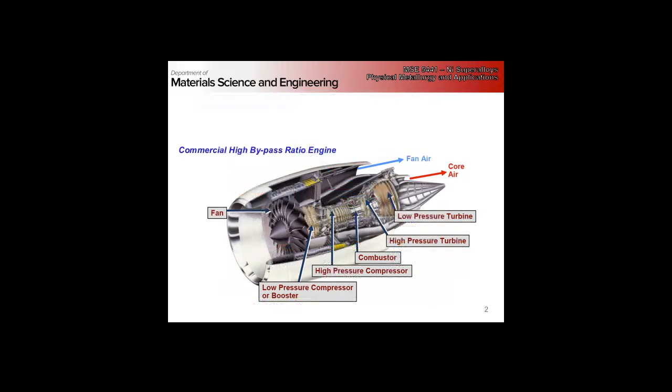And just showing where we are, right? I mean, you probably in freshman and sophomore year had an overview of a turbine engine in one of your engineering design classes, but it works just like any other engine, right? It's suck, squeeze, blow - that's the basic

operating principle of any heat engine. But right, you have compressor, inject fuel, light it on fire, you get expansion across the turbine that lets you do work.

But if we look at particularly the operating temperature, at the T41 stage here, modern engines now are approaching 1625 for military engines, a little lower than that for civilian engines.

So the interesting thing is this pressure ratio. Why between engines of about the time you guys were born and now, why are we seeing a drop in pressures? It's that high bypass turbofan, right? Not nearly as much air is going through the engine. Most of it is, right?

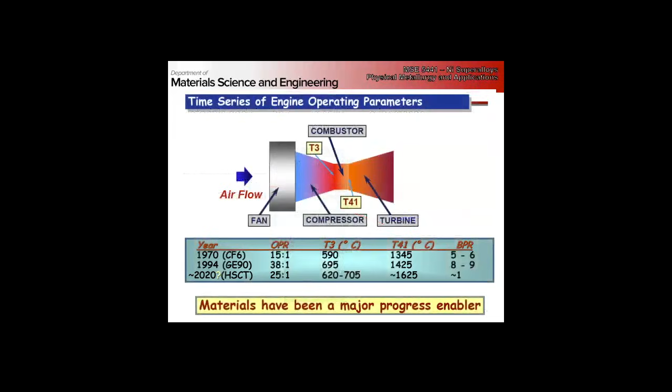Right now, we're running engines that are above the melting point of some of the alloys making up the blades, all because of a combination of very high strengths, active cooling, and thermal barrier coatings. Obviously, the metal itself doesn't see that temperature - it's in an environment that is above its melting temperature.

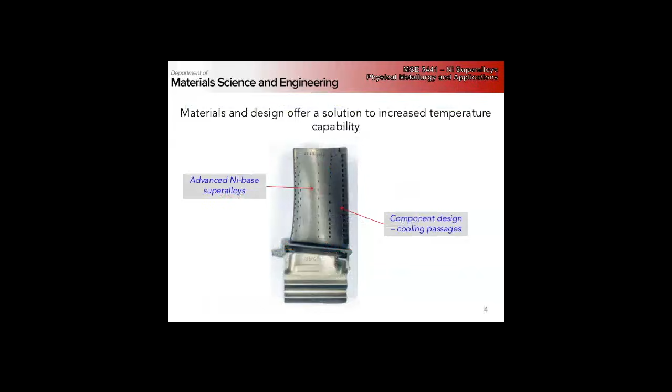Why single crystals? Better creep properties. So our major design constraints are going to be creep and fatigue, specifically low cycle fatigue.

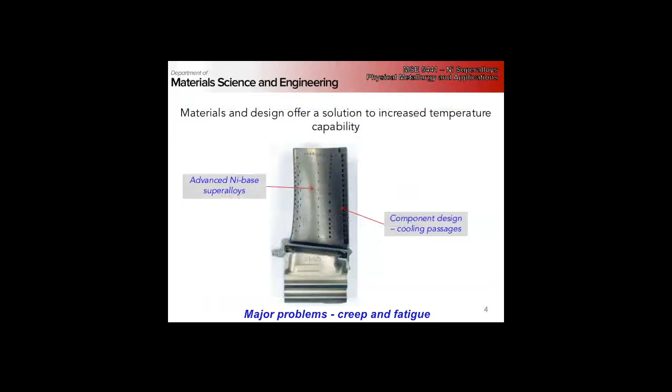So when I say superalloy, what do I mean? Very simply, a metallic alloy which can be used at exceptionally high temperatures, homologous temperatures of 0.7 and above. So the use temperatures are going to be 70% of melting temperature. Why is that significant? What typically happens to properties around that? They take a nosedive.

So we need creep resistance, high temperature capability, oxidation resistance. We don't want any high temperature corrosion. And there are superalloy systems based on iron, cobalt, and nickel. We're going to focus on nickel because that's what's basically used.

Cobalt - why is a lot of research going on to cobalt superalloys right now? Higher temperature capabilities, but it's not capable in terms of strength. So it's higher melting temperature. If we could push that, the problem is we currently don't have the strength with cobalt, and we'll talk about that as we go through.

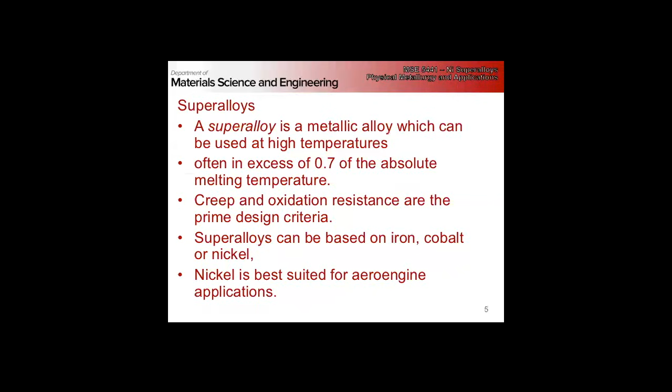So right now, nickel still reigns supreme. Let's take a quick look at our nickel-aluminum phase diagram. The alloy system we're really interested in is nickel-aluminum-titanium, but looking at ternaries is a little complicated, so let's just start with nickel-aluminum right now.

So if we see at about 80% or so nickel, we're in the two-phase gamma prime region, and we go up to quite high temperatures before we dissolve our gamma prime. We go full nickel in, we go full gamma above our solvus into a solid state regime before we start to see any melting.

And this is basically our main processing window. We're going to process, come up super solvus, dissolve all of our gamma prime out, come down, and precipitate a gamma prime structure, and the two-phase microstructure is going to be our main strengthener.

Now, if we look at the other side, the aluminum-nickel side, there's no appreciable solubility of nickel in aluminum. It's basically line compounds, pure nickel or pure aluminum and the intermetallic. Whereas on the other side we have roughly 25% solubility of aluminum in nickel.

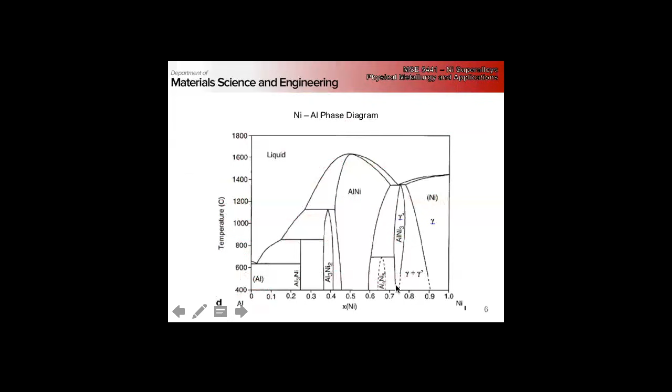Ah, dang it, there's a typo. So scratch out 'less than' and put 'greater than.' It's funny how many times I look at these things and don't pick them up, but then when I'm presenting them, I find all the typos.

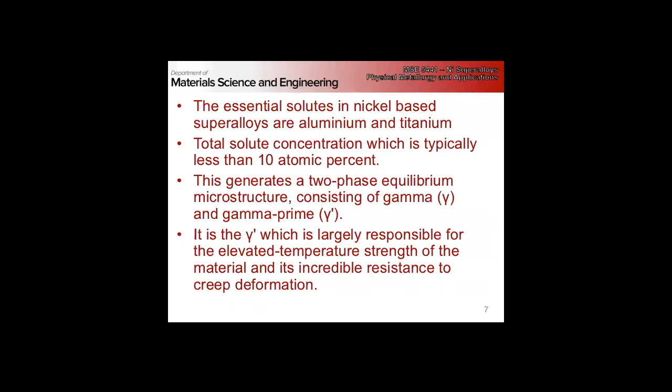So this is basically what we said, the two-phase gamma prime microstructure. The gamma prime is going to be responsible for the incredible resistance to creep.

And if we look at the ternary now, this is at 973 Kelvin. This is the two-phase region that we're mostly going to be interested in - gamma out here, gamma prime. And you can see that most of the titanium and aluminum are going to tend to segregate to the gamma prime.

So here's the gamma prime structure. The important thing to notice about this is the L12 crystal structure - it's an ordered compound, a true ordered structure.

We saw a little bit of titanium with an ordered structure, but when we talked about steel and aluminum, we talked a lot about particle strengthening, but they were not ordered. We either talked about intermetallics like cementite, but we didn't really talk about ordered compounds.

Okay, before I go there - I say it's a primitive cubic unit cell. To me, it looks like FCC. So if this is primitive cubic, what's the motif? How does this translate to primitive cubic? What's the repeating unit? So if it's primitive cubic, any ideas? Crystallography reminder?

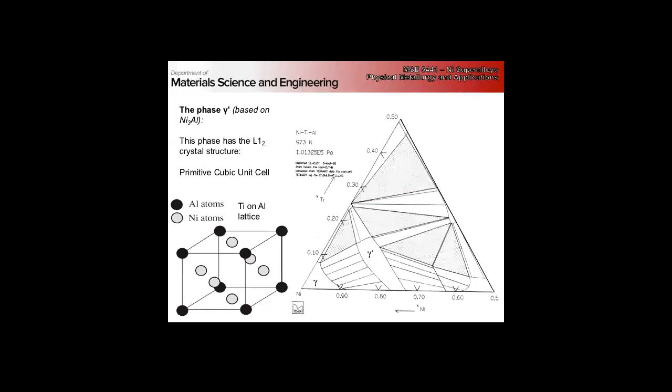Now, if the FCC 1/2[110] partials are separated into 2 Shockley partials, when they come through, they form much more complex fault structures. So we basically have dislocations that want to stay together, pairs of dislocations that want to stay together, and chemical interactions with the dislocation, not only the typical shear stress. Okay, both phases have the cubic lattice with very similar lattice parameters.

The gamma prime precipitates in a cube-cube orientation relationship with gamma. So what does that mean? What do I mean by cube-cube?

100 parallel with 100, faces the 100 direction parallel with the 100 direction. So there's a perfect basic lattice correspondence. The lattice parameters are very similar, so gamma prime is coherent with gamma when the precipitate size is very small. As I said before, dislocations in the gamma are difficult to cut into the gamma prime because the ordering interferes with the dislocation structure. Low interfacial energy.

This coherent or semi-coherent interface is really important for maintaining stability at elevated temperatures. The more low energy the interface, the less mobility it has, and so we maintain a more stable structure.

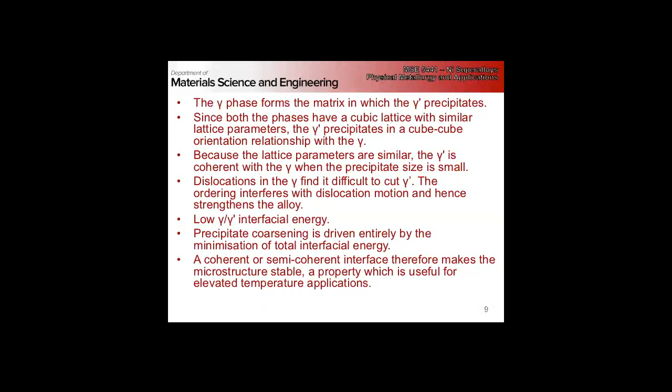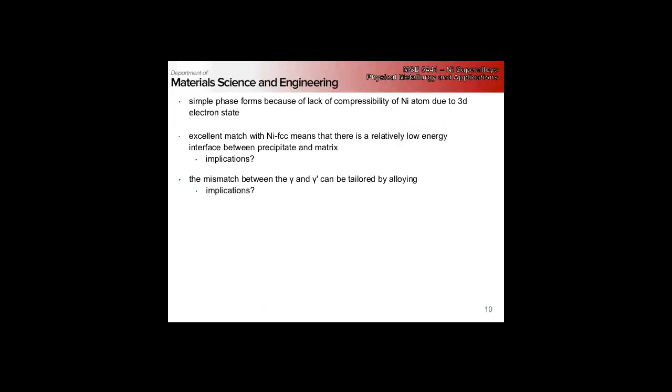So I sort of answered my question already: what are the implications of the low interfacial energy? Mismatch between gamma and gamma prime can be tailored by alloying. So what's the implications there? We can play with the mismatch, we can play with the properties quite a bit, we can play with the strain field around the dislocation, around the particles, and we can play with the shape of the particles by playing with the mismatch.

But as we go through this, we have to remember gamma prime is a real ordered structure.

So, the main contribution to the creep strength—it is still relatively ductile, and we'll point this out at the end and talk about it a lot on Wednesday.

Strength increases with temperature up to about 700 C. Why do I have that surprise indicated there? What typically happens with strength and temperature? It decreases, right? So what is it about this gamma prime structure that gives us an increasing strength? I really wish we actually accepted the interrobang as a proper punctuation mark.

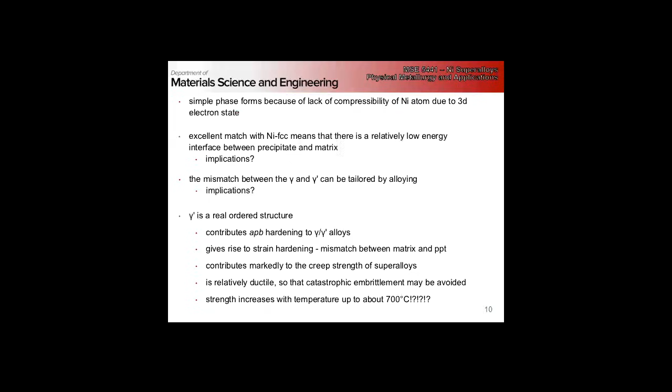Okay, so looking at the phase stability with temperature—personally, I hate ternary phase diagrams, they always confuse me.

But we can see here, basically, if we look as we go up in temperature, the gamma phase field expands. And if you do your lever rule calculation, that means at the same concentration of alloying, as we go up in temperature, the fraction of gamma prime is going to decrease. That makes sense with what we said before, right? We have a solvus.

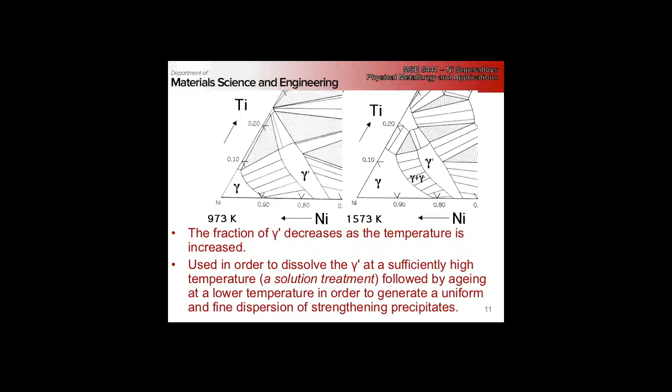So basically, in the ternary, we can go super solvus, dissolve the gamma prime, and then precipitate out a uniform and fine dispersion. So schematically, what does the microstructure look like?

So we have a highly complicated, highly tortuous microstructure. We'll look at real micrographs in just a couple minutes. But if we come back to the nickel...

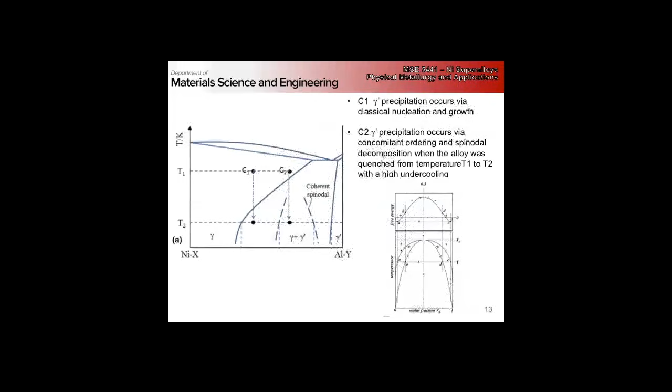Yes sir, can you go back to the slide? So I see the primary gamma prime is around the grain boundary, which is not desirable in terms of mechanical properties.

Yeah, so gamma, we normally don't want primary gamma prime. The primary gamma prime is going to form on very long, slow cooling in age. So we'll have the gamma prime grains and gamma grains. Then in solution heat treatment, we typically want to dissolve all the primary gamma prime.

But in some situations, we don't actually. So we have remnants of the former gamma prime large grains that haven't completely dissolved. So I was wondering, does it have a bad effect, like just because of the grain boundary? It seems fine. It can act as the particles at the grain boundaries.

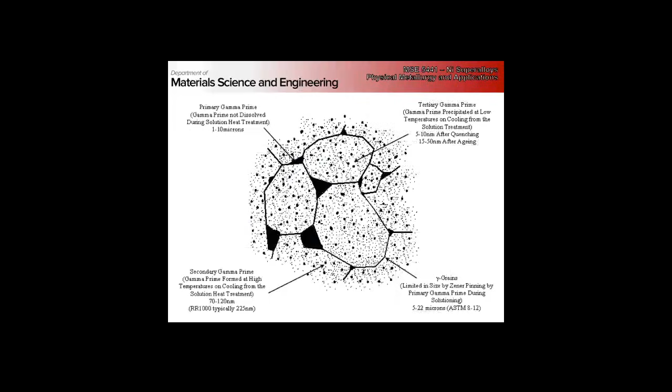Yeah, so these are sort of grains, think of these on the order of 1 to 10 microns. They're not necessarily particles, they're actual grains of the ordered compound. But generally, we don't want them, so we're going to dissolve them away.

So here's our treatment. We come up above the solvus temperature, so we have a super solvus heat treatment to dissolve out our primary gamma prime. As we cool down, we develop our secondary gamma prime. And you can see our tertiary gamma prime in between, in the gamma channels. Notice this is a very high volume fraction of gamma prime.

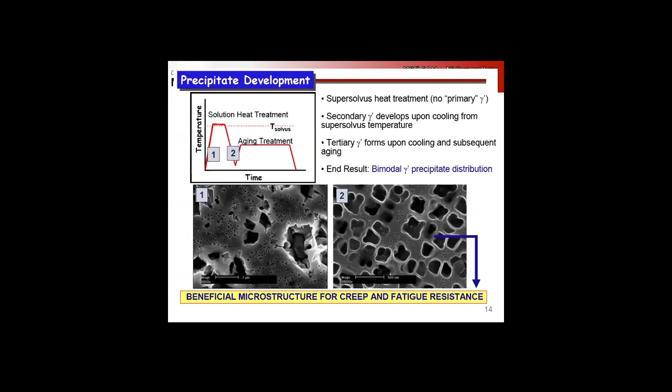So this is a blade alloy. Typically, disc alloys will have a lower volume fraction, but the effective cooling rate is quite remarkable. Here we see cooling at 200 degrees per minute, Fahrenheit per minute, since it's from industry. It's frustrating that if you talk to GE or Pratt & Whitney or even Rolls-Royce, everything's in Fahrenheit.

All right, my temperature scale is all sort of wonky. I understand Fahrenheit up to like 500 degrees, like my oven temperature, but anything above that, I can't think in Fahrenheit.

But you can see here we've got roughly 75% gamma prime fraction, and roughly 170 nanometer size particles for the secondary gamma prime fraction, with the tertiary here about 4%. If we slow the cooling rate, we get more tertiary, a higher fraction of tertiary, a lower fraction of secondary, and the secondary gamma prime are significantly larger. Now you can probably begin to see why the creep properties are so good.

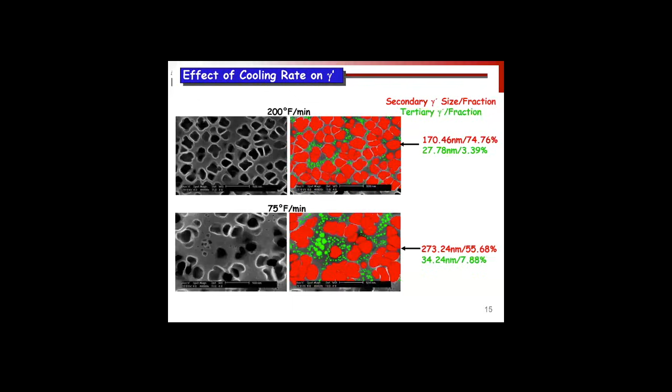The other thing we have to keep in mind is our gamma prime phase is not strictly stoichiometric. We can substitute titanium out for the aluminum. We can potentially have an excess of vacancies on one sublattice versus the other. We can have site mismatches, nickel on aluminum site. And then we have other elements, niobium, hafnium, tantalum, are all gamma prime formers, and will partition preferentially into gamma prime.

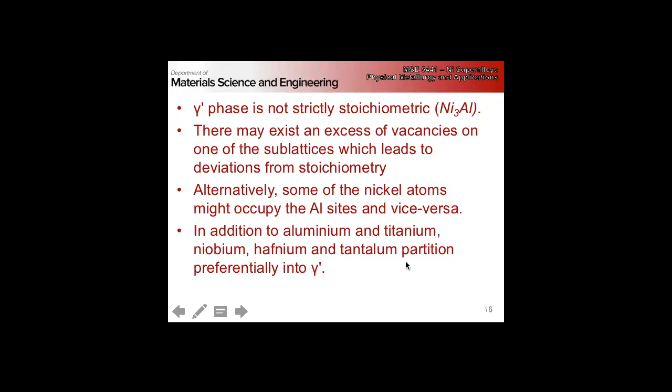Okay, so for microstructures, we got to consider a couple things here: our composition.

On the last slide, you said that nickel atoms might be located on aluminum sites. That's possible, but would that be an anti-phase boundary to strengthen it, or? It can be, but you can also have just ordering mismatch. You can also just have a site swap. It's just a different crystal defect.

If you have a fault from say a dislocation, you do have a mismatch, but that's really a planar fault. There, I was just talking about a site swap.

When designing our superalloys, we have to think of a couple different things. Our gamma composition, because we still want to take advantage of solid solution strengthening in the gamma phase, where we can get significant gains. Grain size, of course, is something we've talked about all semester. Precipitation hardening, the gamma prime, and we'll talk a little bit about gamma double prime, which is a different structure that some superalloys are strengthened by. But we also need to think about grain boundary chemistry and morphology.

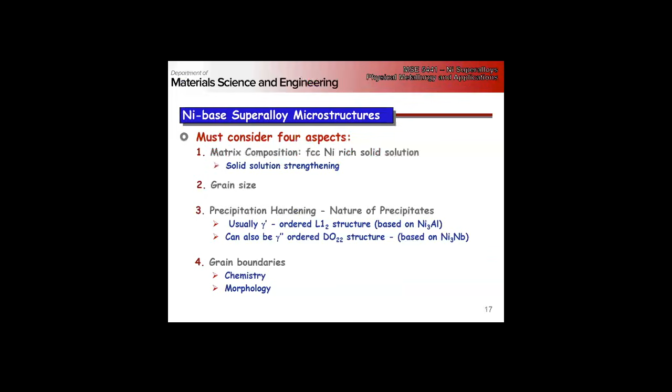As we go through, we're going to come back to these four key ideas pretty frequently. So grain size with respect to key properties - if we look at this, it's normalized life divided by strength, a nice way to visualize this.

But if we look as we go up in grain size, our tensile strength drops from the Hall-Petch effect. We have significantly better creep properties at large grains. So what does that tell us about the creep mechanisms? Grain boundaries at elevated temperatures are going to play a critical role - larger grain, less grain boundary.

Low cycle fatigue decreases as grain size increases. So our two primary design constraints place conflicting requirements on our microstructure. We want good creep, we want good low cycle fatigue - that means we can't necessarily have both.

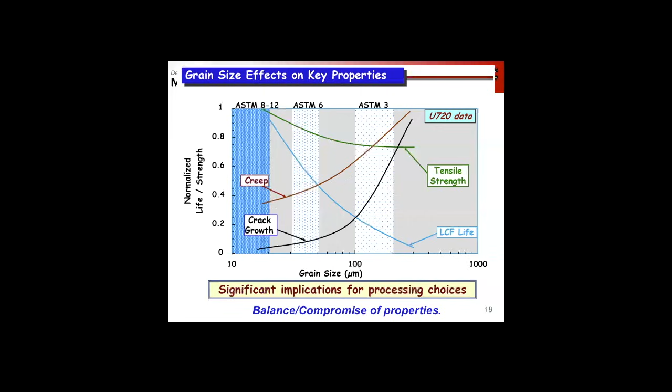So we have to balance our properties. We also want to eliminate variability in grain size - that should be pretty obvious - we want our grain size as uniform as possible.

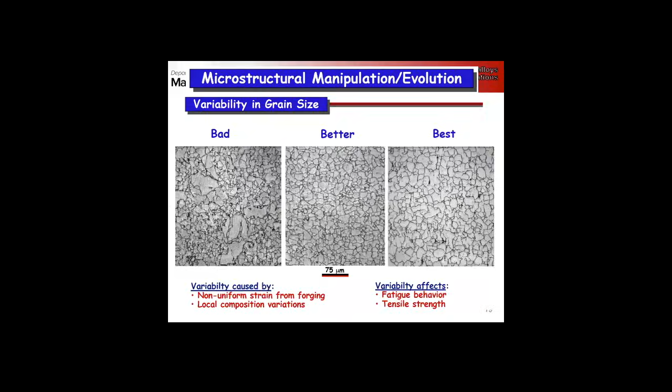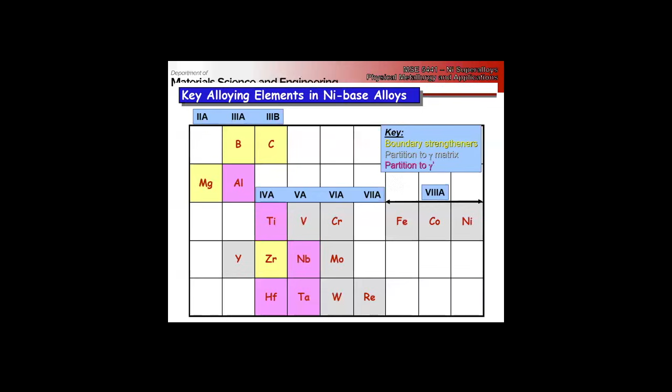So this is our table of the key elements broken up by type. These yellow ones - magnesium, boron, carbon, zirconium - are grain boundary strengtheners. They'll segregate to the grain boundaries. Our gray elements segregate into the gamma matrix, and our purple ones here - aluminum, titanium, niobium, hafnium, and tantalum - will segregate to the gamma prime. We can sort of further break these down.

Classify them a little bit better. The grain boundary strengtheners, the key ones are boron and zirconium, which segregate to the boundaries. They reduce the grain boundary energy, give us better creep strength and ductility. Remember, anytime we lower the energy of an interface, we reduce its mobility - we make it more stable.

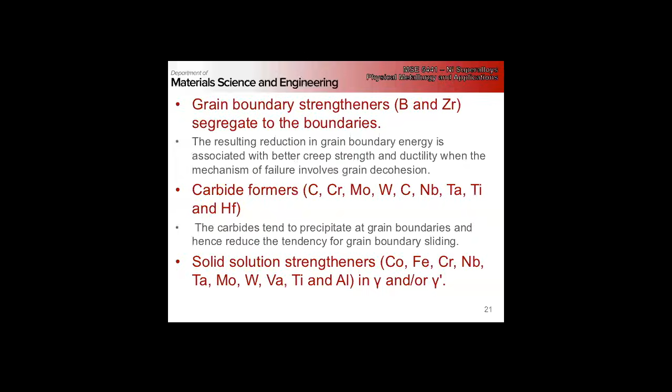Carbide formers - so a list of carbide formers - these carbides will tend to precipitate at the grain boundaries and reduce the tendency for grain boundary sliding at higher temperatures, which are critical for creep. And then we have our solid solution strengtheners, which give us additional strength in both our gamma and gamma prime phase.

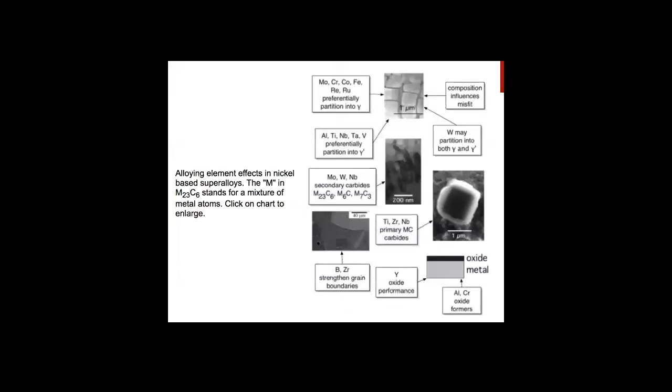So here's the flow chart of the mechanisms we're interested in and which elements go where. If we look at composition, if we look at wrought or powder metal nickel-based superalloys for discs versus blades, they have quite a different composition - significantly less cobalt and chrome, higher aluminum. So we have a higher fraction of gamma prime formers in airfoils than we do for discs.

A key element for current and next generation blades is rhenium - insanely expensive, but it gives really important improvement in creep strength. It's sort of like the magic pixie dust that's in the current generation blade alloys.

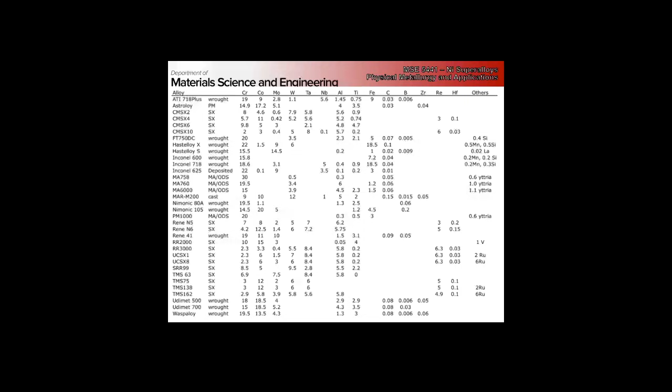But what is important is to know these trends. What are the key differences in alloying elements between blade alloys versus disc alloys, and why certain additions and subtractions might be made.

It would not be out of the question for me to provide an example of a first gen versus a third gen composition of blade alloys and ask about potential differences in microstructure based on the primary alloying element changes.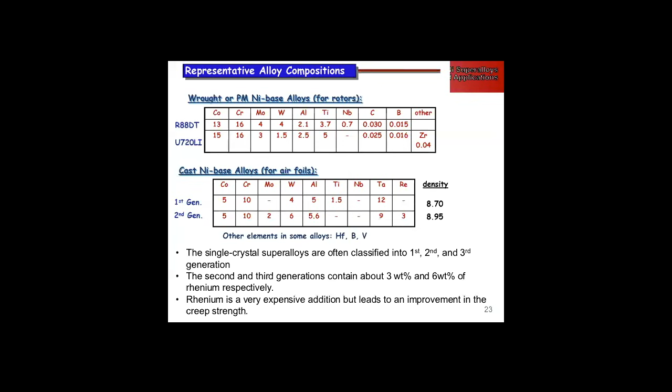Okay, so grain boundary carbides. One key thing that we see about the grain boundaries in a lot of the disc alloys is this serrated, tortuous grain boundary path. The lower energy we can make the interface, the less straight it has to be. The less energy there is associated with curvature of the grain boundary.

And so which do you think is going to resist sliding better? A nice straight grain boundary or this highly tortuous path? And we also have carbides that are going to preferentially segregate to the grain boundary, giving us one.

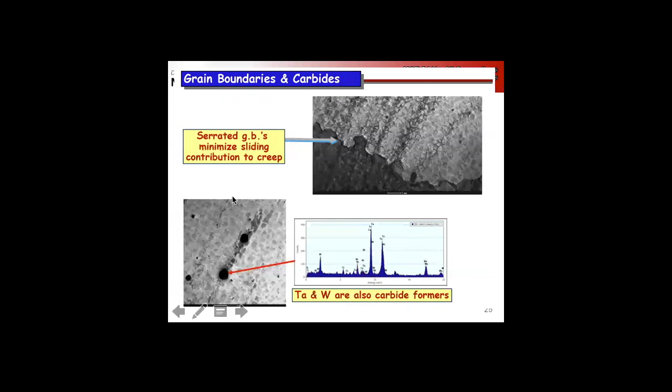We do have unwanted phases that show up, some carbides. Carbides can be either detrimental or advantageous. If we are in a disc alloy with grain boundaries, the carbides are going to be beneficial, giving us an increase in rupture strength. Carbides in single crystal alloys are, of course, going to be bad because then they're an inclusion.

The carbides tend to be cubic and have derivatives of the FCC structure, either the M23C6, metal 23 carbon 6, or metal 6 carbon type stoichiometry.

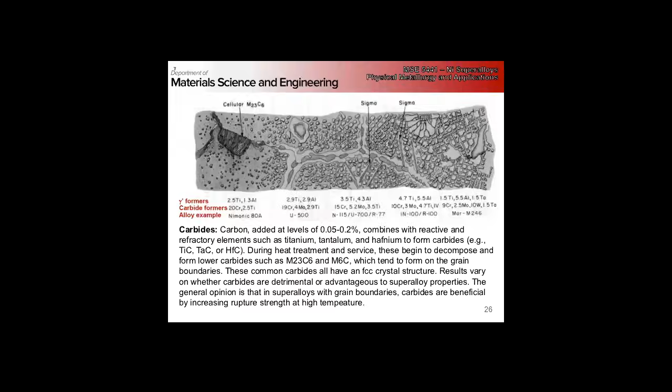The other generally unwanted phase are these topologically close packed structures. These are brittle phases that form during heat treatment or in service. So basically, we have close packed atoms in layers, and then we have things in between that tend to separate these close packed layers, so we have like a sandwich structure.

And they're called topologically close packed, not geometrically close packed. That means if you just look at the topology of what's connected to what, they have the same connections as a geometrically close packed structure, but their geometry is different. They're further separated.

These are brittle intermetallics formed as plates, the sigma phase, and there's also mu phase and Laves phases. The exact structure of these are not important, but plate-like or needle-like structure, really bad for mechanical properties, specifically ductility and creep.

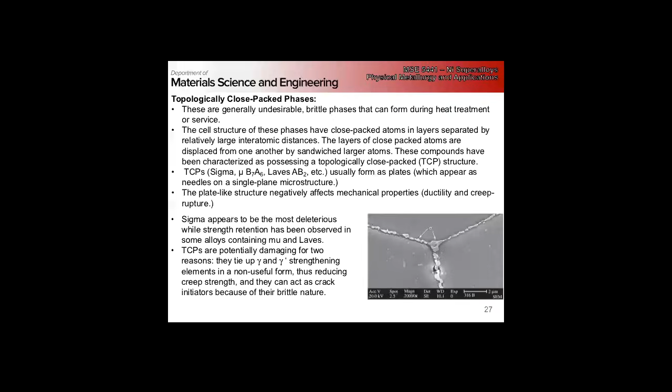So we want to avoid forming these TCP phases at all cost. The difficulty is the things that we're doing to improve our creep strength also increase our susceptibility to forming TCP phases. So the same things that are good for creep also tend to want to form these TCP phases. So we have to be very careful about studying phase stability very carefully, and the long-term phase stability during service, in superalloy development.

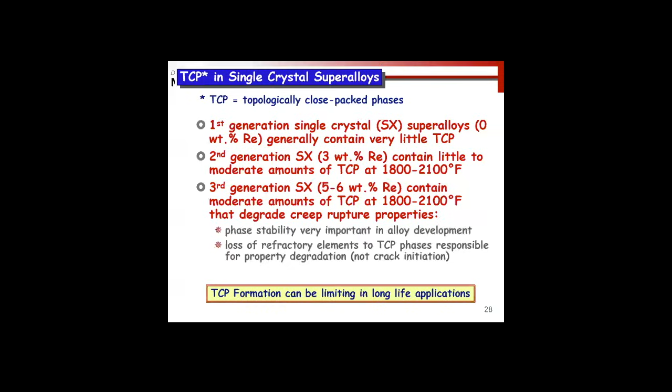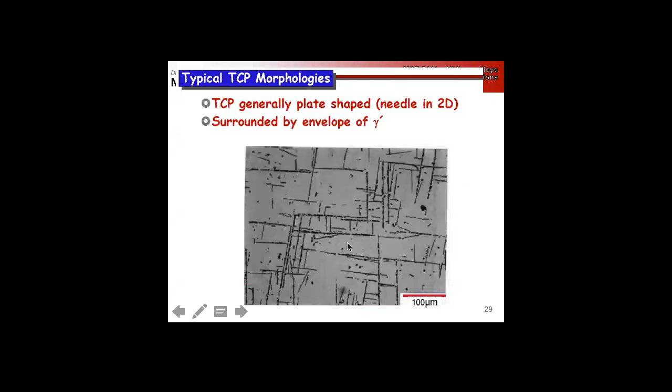And then, oh good, we're right on time.

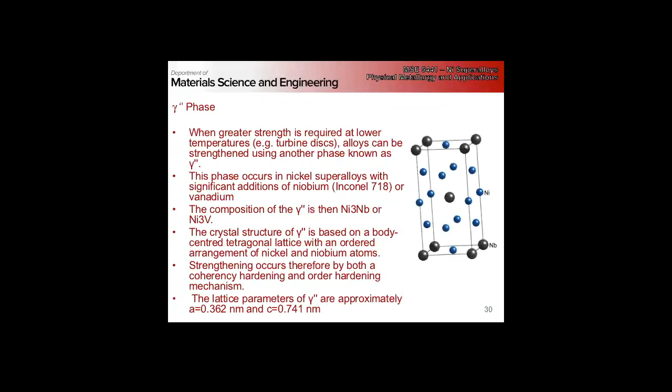And it's a DO22 crystal structure, body-centered tetragonal rather than FCC, so it's not as coherent. So we have a coherency hardening effect and an order hardening effect, and our lattice parameters we don't have quite the same match.